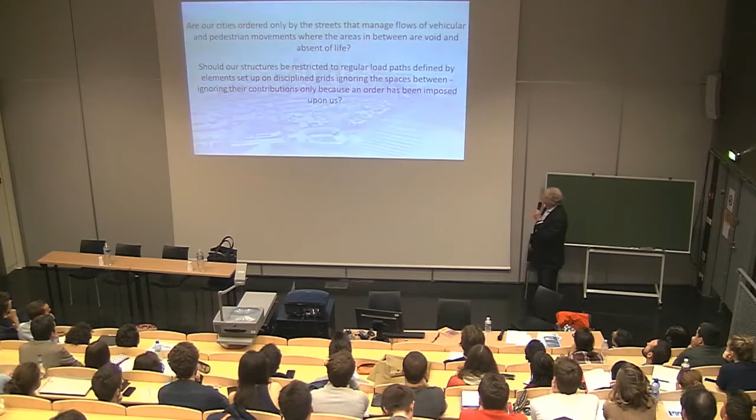So, a question. Are our cities ordered only by the streets that manage flows of vehicular and pedestrian movements, where the areas in between are void and absent of life? Should our structures be restricted to regular load paths, defined by elements set up on disciplined grids, ignoring the spaces between, ignoring their contributions only because an order has been imposed upon us? Should our structures be designed as static objects or as objects that are in continuous motion? Should we continue to think of our structures two-dimensionally instead of volumetrically?

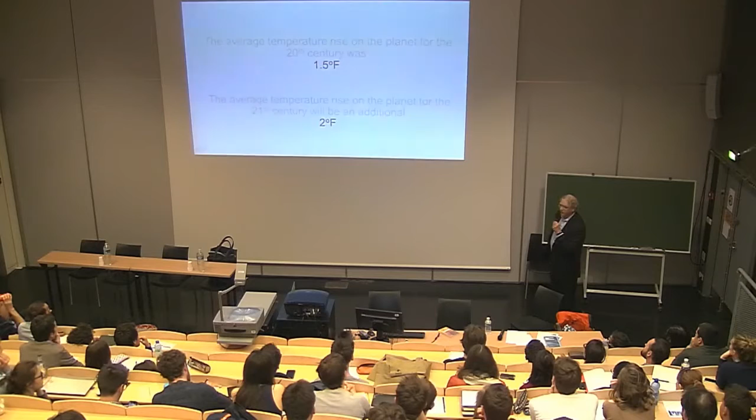Now, you can argue that this might be a natural occurrence, but I would argue that man has a lot to do with the change in temperature on the planet. Over the last century, it was about a degree and a half Fahrenheit change, and we expect that during the 21st century that change will be about 2 degrees. The impacts are clear. The impacts on the environment, the impacts on frozen land are all a result of this change.

So this change has brought on places like this. This is one of 2 places on the planet where every seed known to man is stored. And that's just in case. Just in case the change that happens puts us in a situation where we can't go back. So the question for us is, how do we have an impact on this potential change?

When we build buildings, most major buildings, it takes 20 years for the carbon associated with operations of buildings to equal the carbon that's emitted at the time that we build buildings. So if those buildings come out of service at any time along the way, we've put more carbon into our buildings the day we build them, and the operation becomes even more insignificant. So how can we think of ways of overcoming this change?

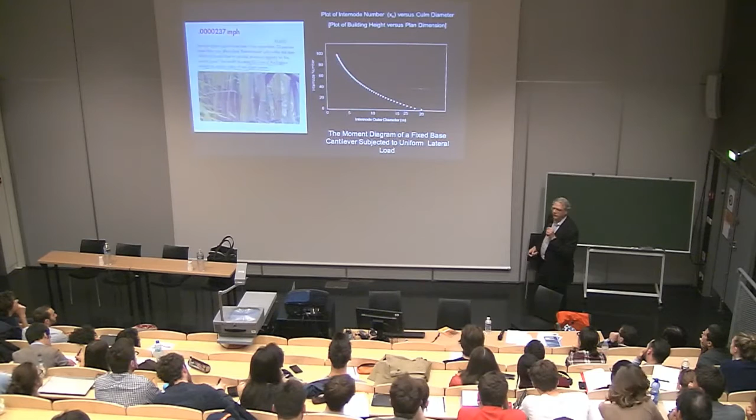And if you were to plot the relationship of the spacing, the diameter of the walls of the bamboo, or the thickness of the walls of the bamboo, you get an equation that looks like this. It's the bending moment diagram of a fixed base cantilever subjected to a constant horizontal load. It's the same principle. The spacing, the diameter, and the wall thickness are all related to the same mathematical principles as the fixed base cantilever.

So we looked at this idea, and we looked at applying this idea to a structure. And perhaps diaphragms are now outrigger trusses. They're connections between the core and the outside that aren't even. Perhaps they're closer at the bottom. They open as we get to the mid-height, and then they close again. We found that with this type of spacing to connect the inside and the outside, we could save about 20% of the material in the lateral system because that interconnection was so efficient.

The core varying in the form that you see here in the middle, the perimeter connected to that core to form an overall system that was combined with these heavy diaphragms. The spacing and behavior is in other places. It's in the tail of the dragonfly and other insects where, again, the section is hollow. The rings are there for a purpose, to keep the walls from buckling. And the rings or the diaphragms vary in spacing but are mathematically predictable.

It's been a few years now, and Mark mentioned this project. This is the Jinmao building in Shanghai. It's 420 meters tall. It uses concrete and steel and a combination of concrete and steel to form the structure. And the most important thing about this building is that it links the center to the outside through a series of outrigger trusses that happen only in 3 places along the height of the tower.

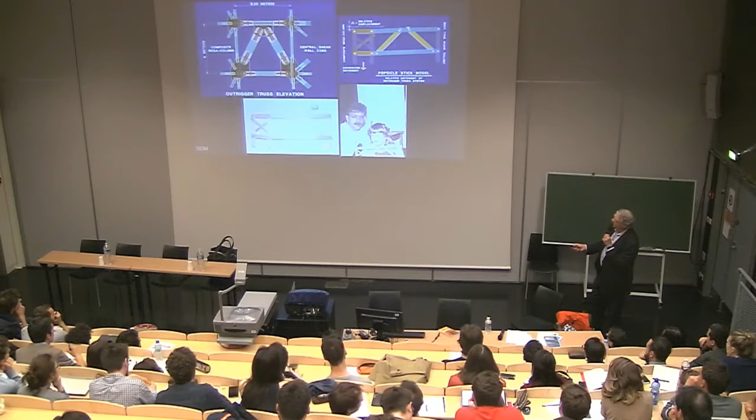So allowing the truss to move, and the most important part of it were the slots at the head of the diagonals. So it's been a couple of years, but this is what I did on Saturday nights. Okay, there's a beer bottle in the back. It's my daughter, who's now just finished graduate school. This is a popsicle stick model that we created with tongue depressors and wood dowels to create this and confirm that the relative movement worked, that the thing would slide.

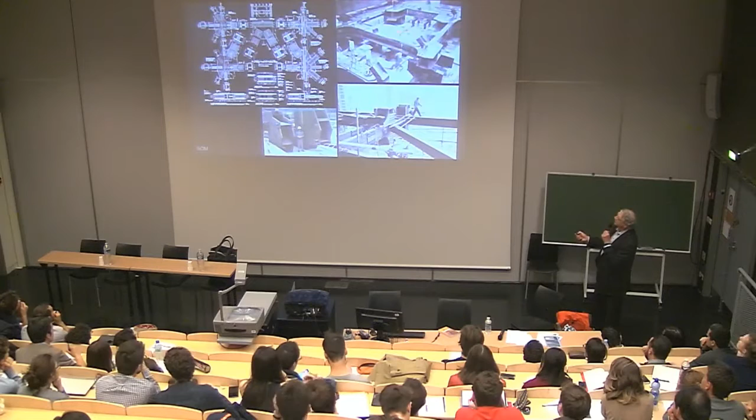So the working drawing, the structure, the truss at the plant, then in place, and to give you a sense of scale, that's one of the connections for one of the members in the truss. So it started with a problem where we needed to allow for relative movement. And it ended with this idea that perhaps structures should remain in motion, or we should think of structures in motion at times during their lives.

So there it is. It's finished. Now there are two others, one of which Mark talked about, which is on the left side of Jin Mao from this perspective, and on the other side is the Shanghai Tower, which is just finishing. And actually Jin Mao is the shortest of all three.

At about the same time, I went to this place, and this is called the Isle of Chiloé, and it's very, very far south. It's about an hour-and-a-half flight south of Santiago. And what I found there was indigenous architecture, a place where buildings were of low scale, but I also found that there were a number of Jesuit churches. And these Jesuit churches did very well during the 1960 earthquake. In fact, it was probably the largest earthquake ever recorded until recently. And I began to wonder, why did these churches work so well in the earthquake?

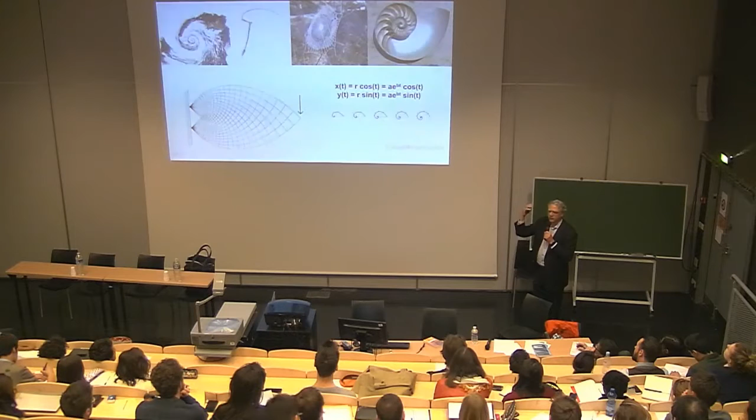So what if you took the hurricane and instead of thinking of it as an applied force, think of it as a resisting force, equal and opposite. Okay, imagine that. So imagine structure near the eye being strongest and least at the edges. And imagine standing the hurricane vertically or perhaps three-dimensionally. So you get a resisting system now that's thought of in a different plane.

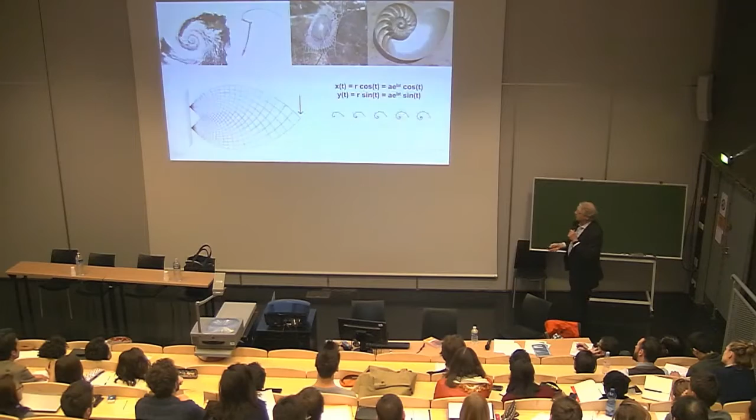And then combine the idea with something that has been around for a long time. And Michell came up with the idea mathematically describing the perfect cantilever with 2 points of support and a single point of force. This is the shape that the cantilever actually, its most efficient form would be. So what to do? This mathematical prediction.

At the same time, a friend of mine became very interested in the idea that we were developing for the tower, and this is an excerpt of what he said during an address to his incoming students for that year. He was the head of the San Francisco Theological Seminary, which was located in my hometown in San Anselmo, California. And he said at the time, what if we could develop strong, flexible, responsive, adapted, sustainable human beings based on the intrinsic architecture of the hurricane?

Buildings that exist in harmony with, instead of trying to resist and stand up against and conquer the powerful creative forces that might otherwise threaten and endanger us. So in other words, coexisting, right? So how can we come up with ideas that coexist with forces rather than just resist?

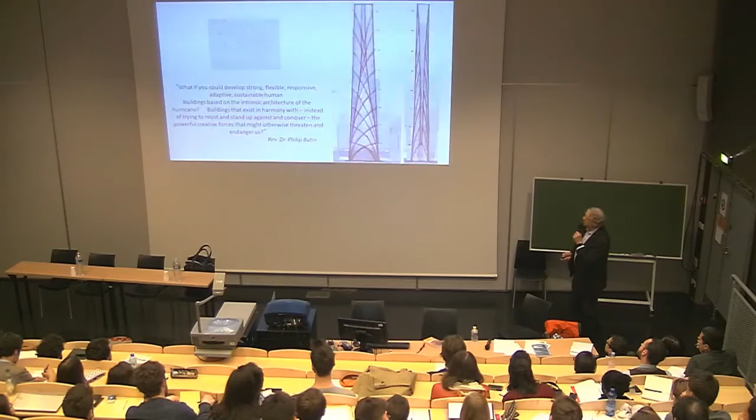So we took this idea, and the proposal that I had was a building that looked like this. Of course, it doesn't work. Our architects didn't. No. There's no way, right? Can you imagine that on the skyline of San Francisco?

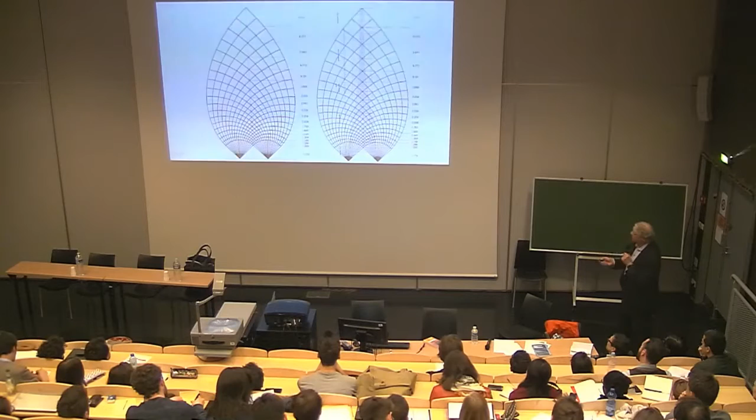Okay, so imperfection. The idea that this principle could be applied to something that had a varying form. So over the height of the building, we saw areas of highest demand at the base. We wanted to open the central axis to this train station beyond. And what you see is a beautiful resolution of structure that starts out highly concentrated and then opens as it gets towards the top. It's a proposal. As I mentioned, we lost the competition. But nonetheless, it's something that I think leads to other ideas.

There's a theory called emergence. Now, emergence isn't something that's absolutely new, but it perhaps sets forth a way of thinking that we might consider with our buildings. And emergence is the idea that the collective of common individual elements when working together are far more powerful than any individual element working on its own. All right? So there are examples of that.

Birds in flight, sand that's impacted by winds, termite mounds that are super cooled, honeycombs built by bees, and guess what? Cities, people, this room. This is an example of emergence. The idea that the collective, when sharing ideas and working together, are far more powerful than individuals on their own.

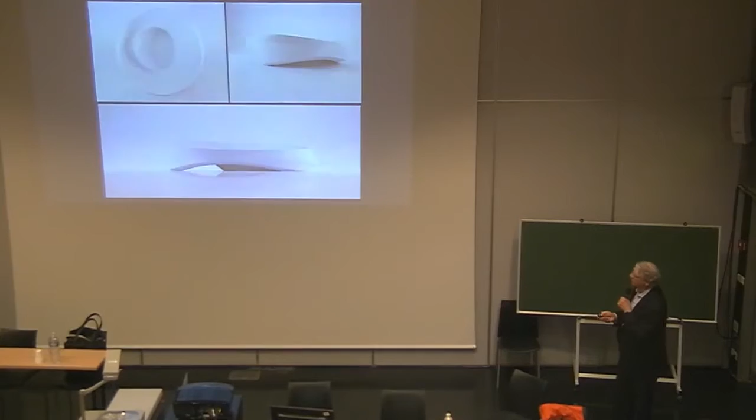And maybe we need to think about our structures more as surfaces or volumes rather than beams and columns to create something that perhaps is beautiful and perhaps something that leads to even future efficiencies. And you can use these optimization principles for forms that are not tall buildings, right? Buildings that have shapes that are less defined, perhaps. Points of support, in this case, an analysis that looks at gravity loads.

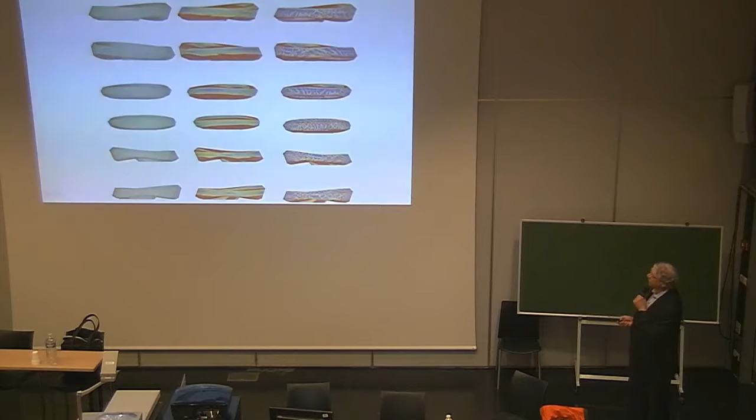And the diagram that you see on the far right is, again, areas of highest concentration of load, with the red and blue being least concentration. And you see these sort of organic trusses that start to form, providing the most efficient way for those forces to flow. And thinking about structure perhaps through spaces rather than just at the perimeter of spaces.

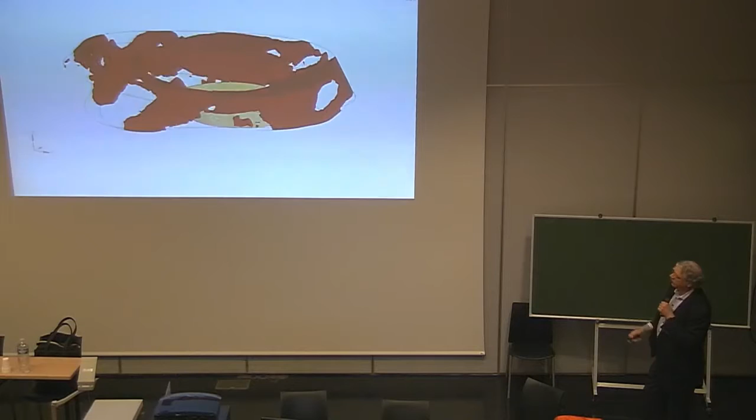How many of us think about this space that we're in and the three-dimensional volume of this space and perhaps structure that moves through this space in some way that we haven't thought of before? It's working toward the least amount of material for these points of support at the base, and you see the response of the positioning of material within the structure.

The strongest remains, right? It's the idea, in this case, winds against the Matterhorn. What's left over is perhaps what we should focus on in terms of our buildings. So buildings might look like this, where the structure erodes over its height. It's an apartment building in China that we've proposed.

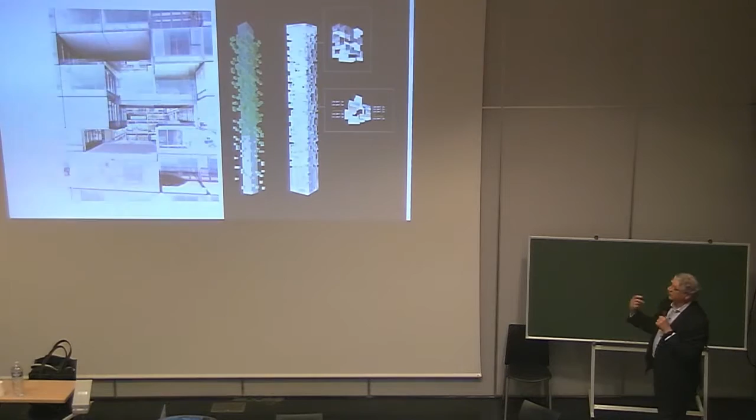It's not built yet. But what happens is it creates these very interesting spaces that are far above the ground, but perhaps the structure is eroded in a way, in this case maybe using concrete walls and so forth, over the height of the building that relates to architecture and creates something that might perhaps be unique.

Now you can take this kind of idea, those principles, and apply them to things that are pretty regular, right? This is a pretty regular looking office building in Salt Lake City. We've got a little problem. Cesar Pelli actually was involved with this project here. There's an air rights problem at the base of the building. So this is a performing arts center, and somehow the ownership rights are shared here, but no vertical structure can pass down through the volume of the performing arts.

Now, Salt Lake City is not a super urban, super dense place, right? So you wonder, how do we get ourselves into these sort of problems? Why would we have a performing arts center that spills over into the neighboring site? Anybody's guess, I don't know. It has to do, I'm sure, with the size of this particular site for the Performing Arts Center and the fact that the program exceeded really what they needed for the site.

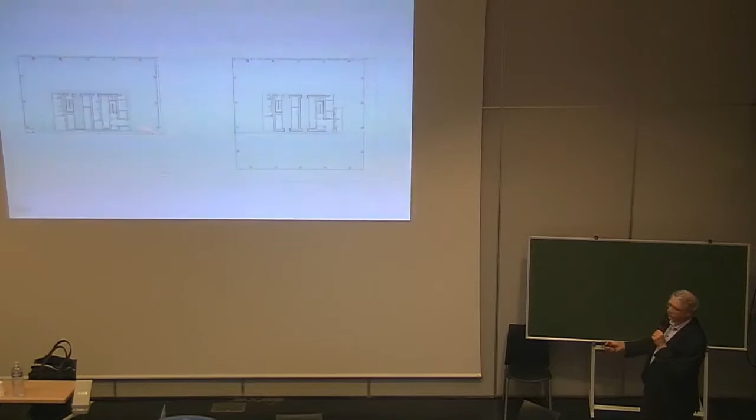So, here's our 25-story, very regular office building, not able to meet the ground on one side. And if you look at it in plan, it's pretty straightforward. This is a building that you might do anywhere in the world, where you have a center core, it's concrete, a steel frame at the perimeter. But guess what? You can't have anything here for the lower 5 stories of the building.

So what we did is we looked at this structure as if it was an optimized volume. And what you find is something really quite interesting and beautiful, where the areas where we have to take away structure, you find that the points of support, there's a concentration of load. And again, the areas in blue are not high demand. The red is the highest demand.

But this is a pretty wide building, right? So you'd have to step these tree-type shapes across the width of the building. And the tree shapes don't work so well with office use, right? So what to do? We've got this nice study. But we found also when we looked at this study that the building tends to turn over, right? It makes sense because it's highly eccentric and it's actually leaning under its own weight.

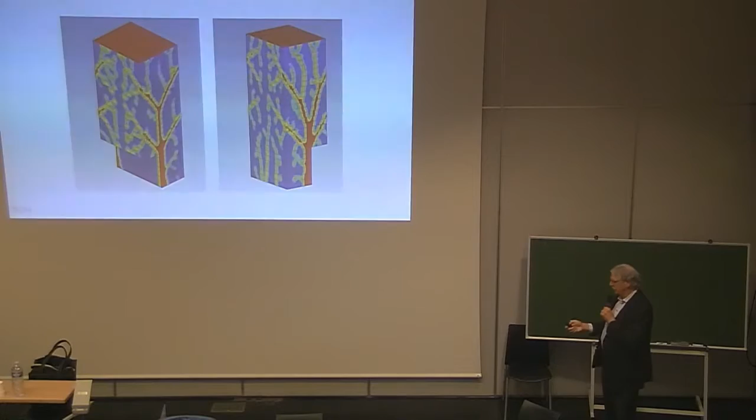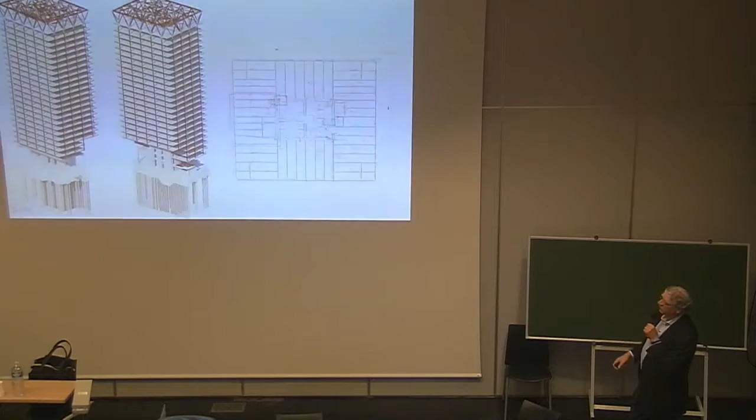So instead, we took away all the columns at the bottom, all of them. And we sent the core up for 25 stories, and we suspended the entire perimeter of the building with a truss system at the top. And these are all columns in tension. We built it from the bottom up. We had a special system to do that. And then once we reached the top, we placed the truss, we pulled the temporary shores away, and this entire building is supported by the central core.

The bearings come back. The pins and the bearings are repeating themselves. Now, this isn't a base isolation where you put bearings on the bottom, you put them on the top. And you might ask, well, why did you put them on the top? We put them on the top because we were trying to take load from those big trusses and send it vertically through the core. We didn't want those trusses to bend the top of the core.

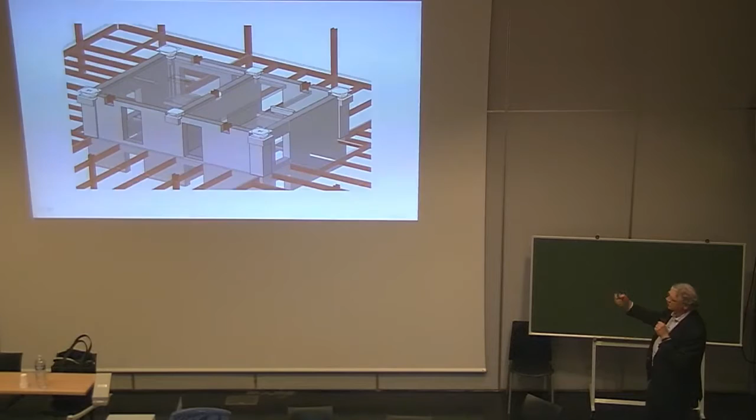So using these bearings, we actually forced most of the reaction to go straight down into the core and pre-compress the core, you might think of. So we do have large earthquakes, so we have overturning, but all of this weight being on the core actually helps us for overturning during the seismic event. And then we have things like these shear keys that keep the truss in place so it doesn't just freely move at the top of the building.

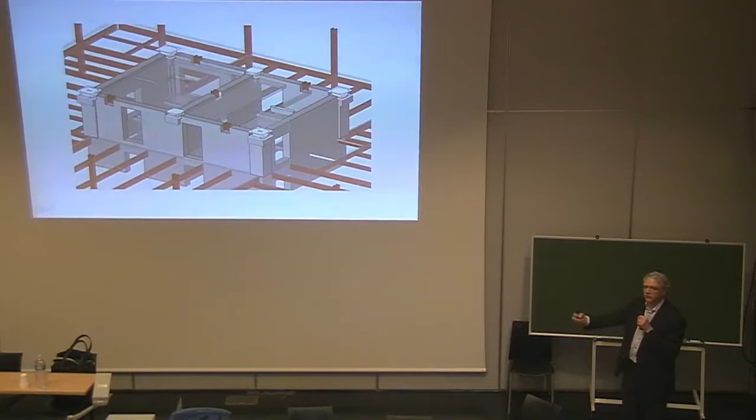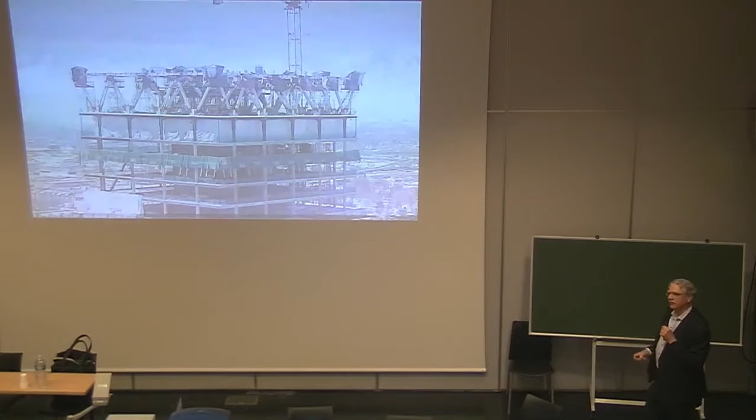So this has really happened, and we actually created a saddle system on one face of the building to temporarily support it. We used the core like a very large mast during construction to do that. And this is just a few weeks ago. This is a beautiful place, mountains beyond, this truss system being placed at the top. But the idea came from that optimized system where we were looking at that central core and also the way those loads would flow.

So this was the night before we actually released the temporary system at the base of the building. And one thing to note that because of the construction sequence, we actually had the exterior wall being placed on this building before we released the jacks and having the building come down, which is a very difficult thing to do in terms of controlling movements and so forth.

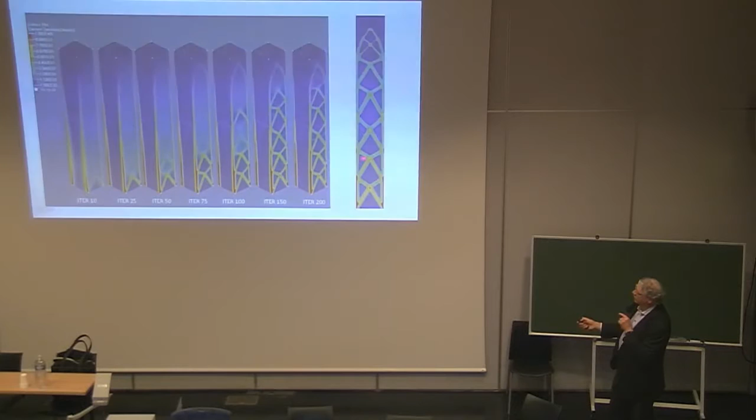Okay, so back to nature. You know, we've looked at these sort of optimization studies for tall buildings, and in these studies you find that the bracing systems for our tall buildings, in fact, are more efficient if the bracing's not concentric. Okay, so you think about the John Hancock building in Chicago or other buildings here in Europe using concentric braced systems, right? Well, you find that if the bracing system, in fact, was a geometry where it's approximately 3/4 to 1/4 in height, the system is much more efficient in terms of resisting lateral loads.

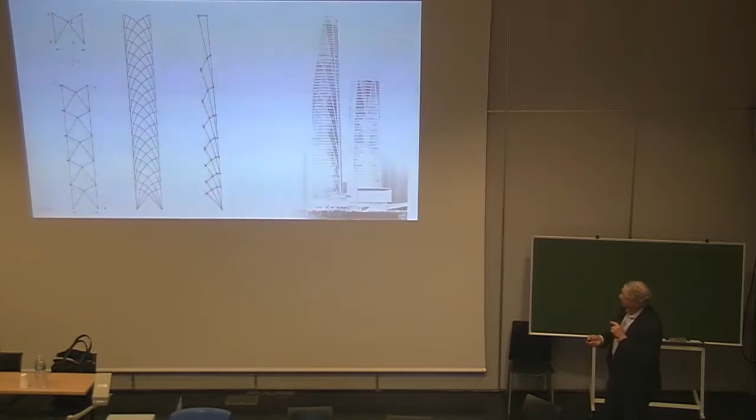And there's an interpretation, okay? So architecture can be pretty static. If we were to design that building the way I showed you before, it's a pretty sterile, pretty static kind of idea. But what we did on this project in Shenzhen, and it's a building that's under construction, is that we took the original concept and we interpreted it. First with a regular spacing over the height, and then next varying the spacing over the height. So the density at the bottom is sort of like Transbay, the one I showed you from San Francisco. But what it does is it allows for greater open space, column-free space at the top of the building, and a response that I think is far, far better than it would be with the sort of theoretical solution.

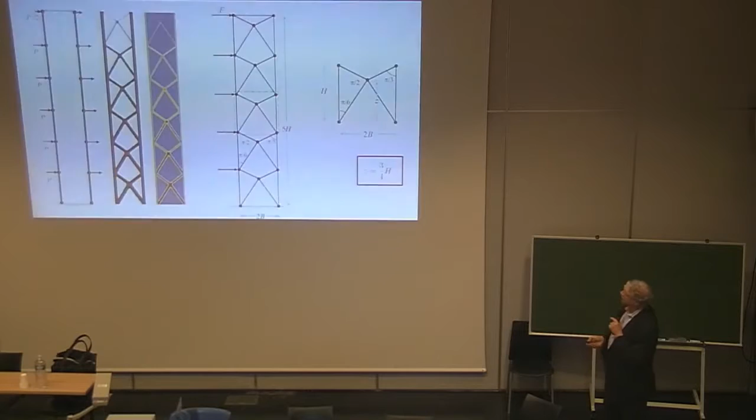So here are the principles, and it's based on virtual work. It's based on the application of lateral load and the placing of these bracing members that give us this very efficient response.

Now, for tall buildings, and we had a small earthquake here just a week or so ago, but for tall buildings, the greatest dilemma has been that for a tall structure, the best solution is to create members that are in tension or compression. Okay, bending is very bad in tall buildings, right? So moment frames in a tall building, bad. Not that it doesn't work, it's just that it's very inefficient, right? But if you could create structures that had diagonal members, that's good, tension and compression. But the problem is when the earthquake comes, tension and compression could become very brittle, right?

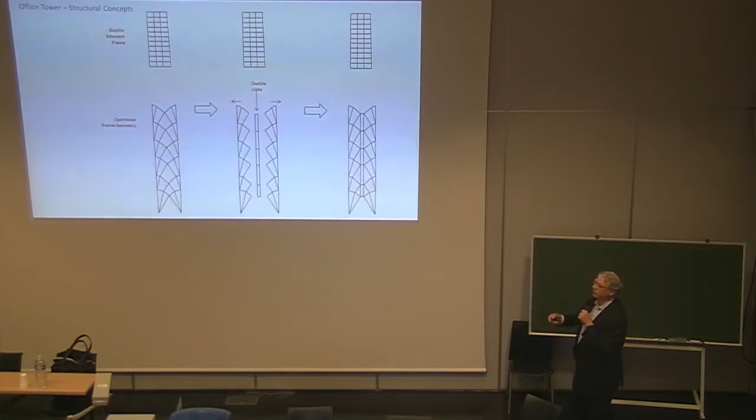So what we've done is we've created these links or these fuses that allow the building to fuse and dissipate energy during the big earthquake. So it's very stiff, I'll say, for typical wind conditions and moderate earthquakes, but when the big earthquake comes, these links will fuse and dissipate energy, sort of like that pin joint that I showed you earlier. So we think this is a breakthrough in terms of how we combine systems in very tall buildings and how we're able to get efficient structures and deal with the earthquake at the same time.

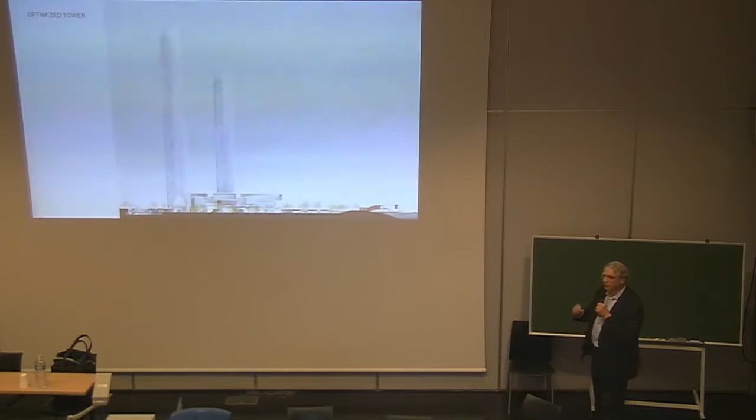So this building has that. There's a fused system up the height of the building. It happens on both towers. It's on the sides of this one. You can't see it. But combining and thinking of both loading cases, primary loading cases in design. Really large open spaces at the bottom, no columns, just structure at the corner. Again, reflecting on Trans Bay, which was probably 10 or so years before.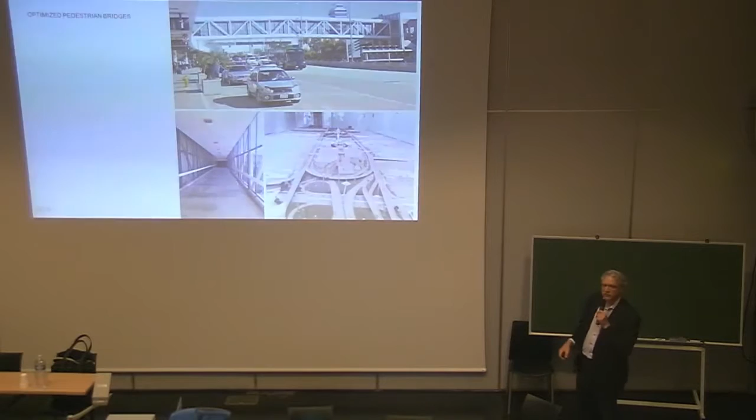Now you can take this and you could think of it on the horizontal too, okay? So these aren't just principles for tall buildings. These are principles that you can use in bridges. Now, forever and ever, we've got bridges, Warren trusses and Pratt trusses, and trusses that are very efficient, that we just think are good enough. We just keep using them, right? I mean, you see them everywhere. Now, there's some creative engineers. We've got a couple of creative engineers here in the room that rethink this and do really beautiful responses that are not so conventional.

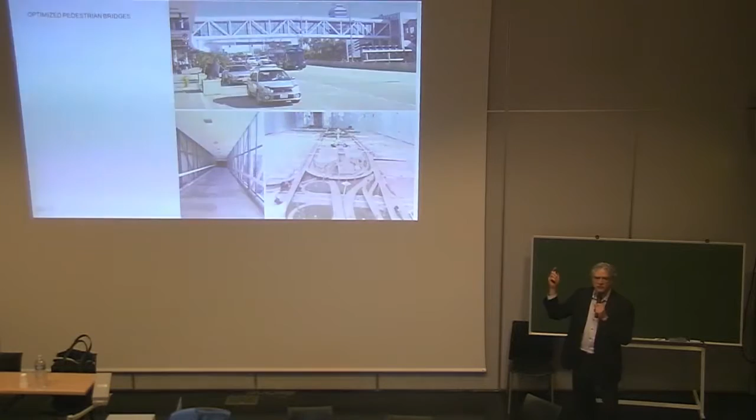But if you take this, and this is Los Angeles, this is at the airport, pedestrian bridges that are up to about 160 feet long. And you take the principle of the tall building and you turn it on its side, where you have the fixed base of the tower now in the middle, okay, and you mirror it. And you look at the bracing, the diagonalization, not as a conventional Warren truss or Pratt truss, but as something that looks more at this 3/4, 1/4 principle, and you find that you can save 20% or so of the material by doing this.

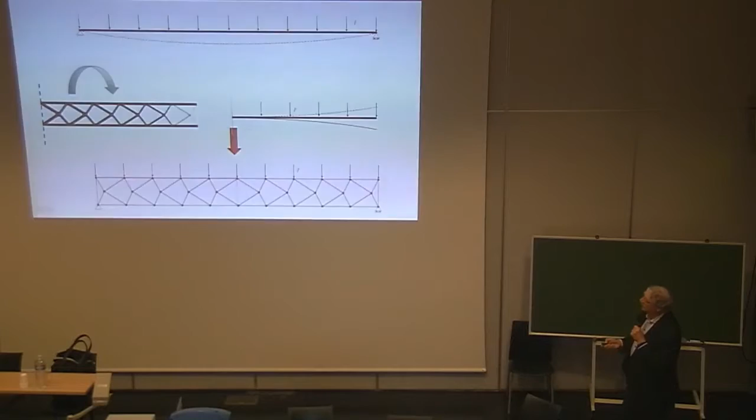Now you could argue, oh, this is harder to build, right? This is not what people normally do. All right, that's the first thing you're going to hear. But the point is that these opportunities are there, and I think we're getting better and better about the communication of our design drawings to construction. So these things are going to become, I think, less expensive to build, and in the end are the right things to do. Savings of material, perhaps prefabrication, these are all part of the idea.

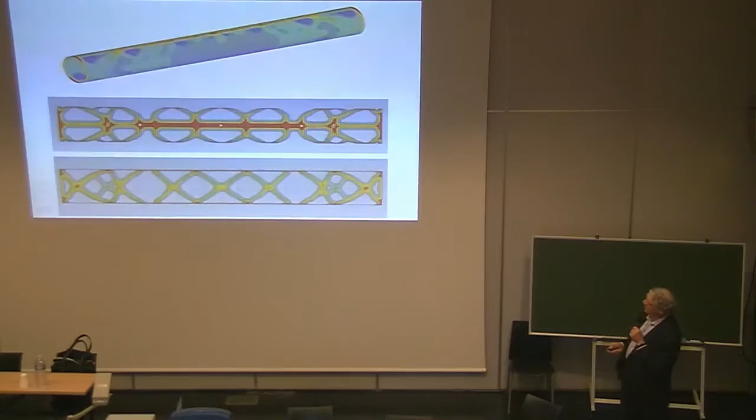And you can use these optimization principles along the length. In this case, it's a cylindrical section that shows the placement of these trusses and then the interpretation of these trusses when we look at it three-dimensionally, right? So it's not something that necessarily has to be in a plane. It can be around the shape.

Now take this idea and put it in plan. And Mark Hymans is here. Mark worked in our studio in San Francisco. And he's very interested in post-tension systems for buildings, right? And we were building this building, which is an office building in San Francisco. I'll call it a core-only building. So it's all concrete. And here it is. Here's the core. And it's got a series of columns around the perimeter. That's it. So this is something we build over and over again.

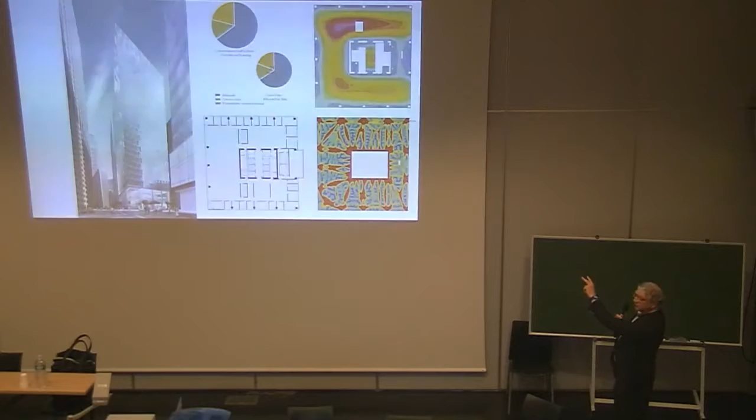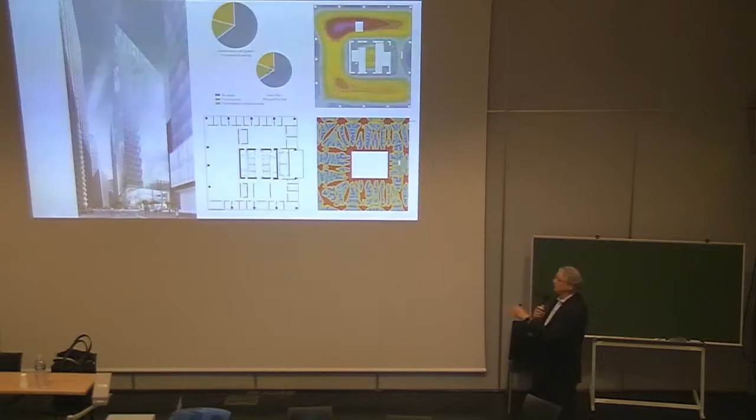But what if we took these same principles and looked at it in plan, mapping the stresses in plan and mapping the placement of post-tensioning and materials, and also creating flat plates where you look at things like deflection, long-term creep and shrinkage, so that you can camber in advance and look at it carefully. So the spans here are about 14 meters from the core to the outside. They're pretty far, and normally we would use what? Beams, maybe steel, but in this case, the idea was to use a pure flat plate. Now, when you think about the environment, you think about these kinds of things too, not just a flat plate, but maybe putting things in the slab, right?

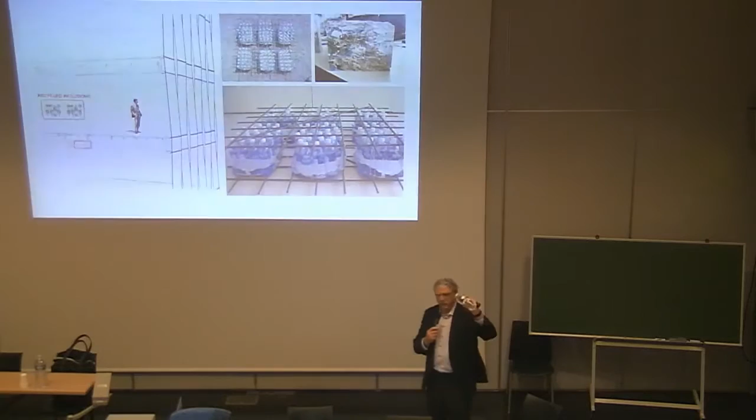So, okay, these guys, well, a lot of people have these. When we drink water from these water bottles, we usually put the caps on them, right? We usually take them and put the caps on, and then we say, we'll put them in the recycling bin. Okay, probably 80% of these things can't be recycled. They just go into the landfill. We started thinking, you know, what about this landfill that we've got, and what happens inside of this container when you put the cap back on it? It traps the air, right?

Most of our slabs in our buildings, for instance, if you had a two-way slab where you had 4 columns, most of the concrete in the middle you don't need. And the only reason why we put the concrete there is because it's easy, right? We just pour the floor, we put the concrete in. In fact, the concrete in the middle is actually adding mass, and it's using raw material.

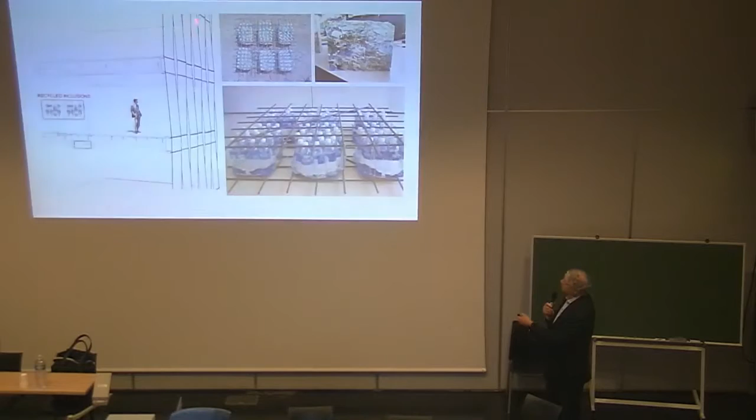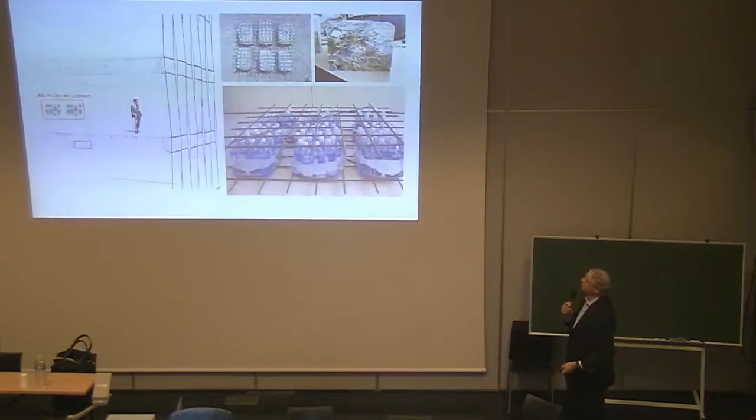It's creating carbon. But if we put these water bottles into the slab, now I'm not saying just throw the water bottles in, okay? You gotta place them in an engineered way. You gotta get concrete in between them, and you've got to place them so you have concrete on the top and on the bottom. But it's a volume that you can take away material and use this stuff that's going to end up in the landfill anyway, right?

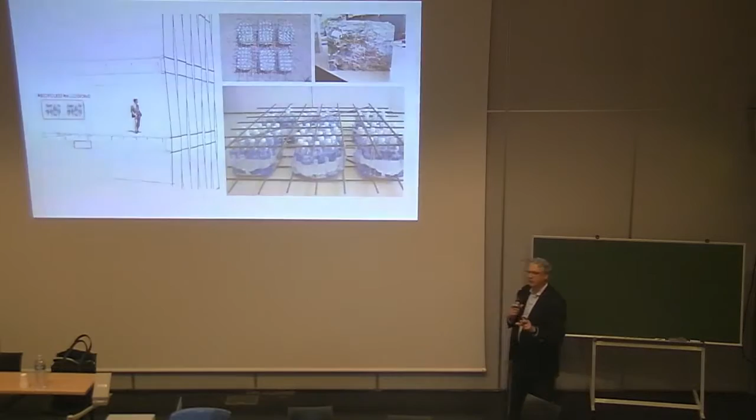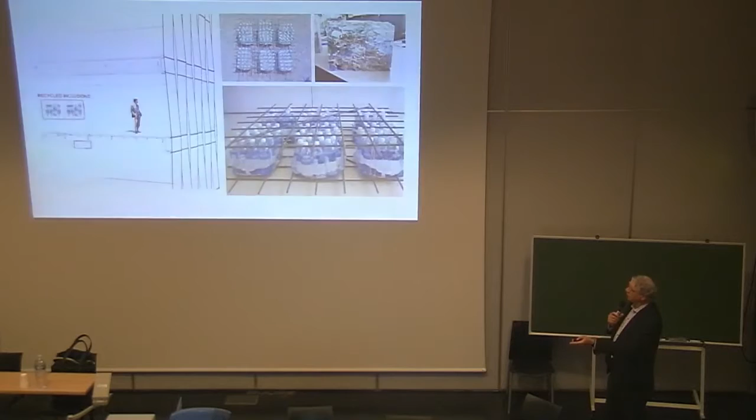So think about these things when we talk about the environment, and it doesn't have to be water bottles. It can be compressed plastic, right? There are other ideas out there. There are spherical balls people have put in, and all that stuff works. But the point is, can we use material that's going to be in the landfill anyway in our structures and lighten the mass? In our case in San Francisco, because we have high seismicity, it gets into our lateral systems and everything, so if we can lighten the mass and build a lot of concrete buildings, it's a good thing, right?

Okay. Save material. For this building, we could save 20 miles of concrete sidewalks, or maybe the steel for 1,000 cars. A big deal. It's worth thinking about. The client for this project was really excited about this. In fact, he said, okay, we should get people to get water bottles from San Francisco, we'll assemble it, it'll be a community effort, we'll bring the water bottles to site. So whoa, wait, it's a little bit more complicated than that.

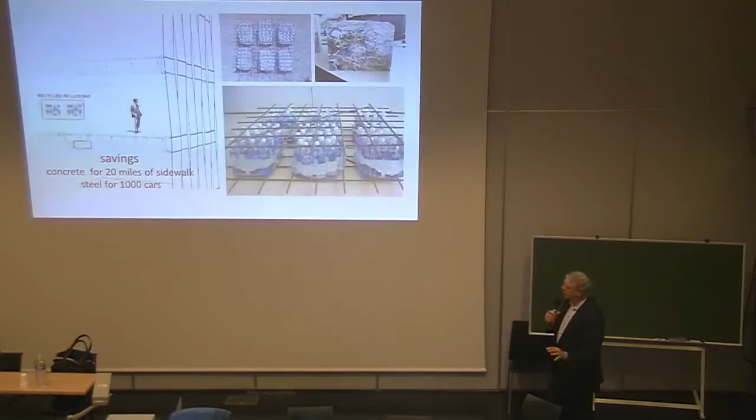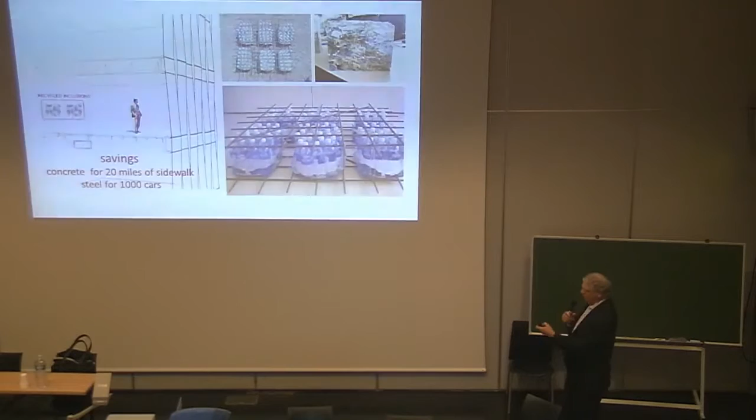In the end, he sold the building and the site, and the client that bought it, get this one, even with this plastic, they said, look, the supply is not fast enough. We can't get the supply to the site fast enough to build this building. And it's true, because we're stuck on this idea that we have all this material, but getting it to the site in a way that's controlled takes a process. It takes a will, right? And he just felt that there wasn't enough time for this to happen. So I don't know, we'll see.

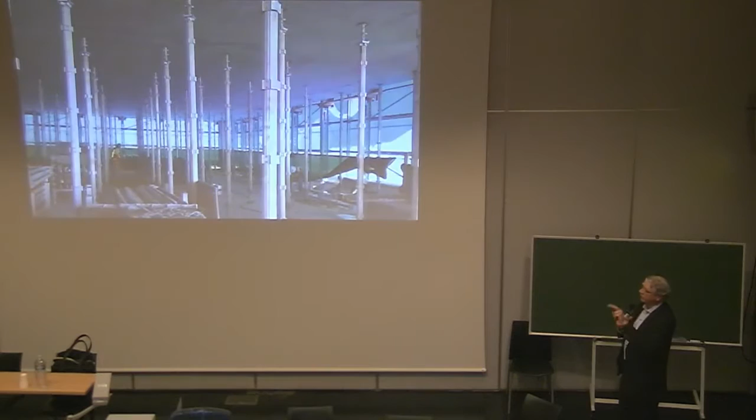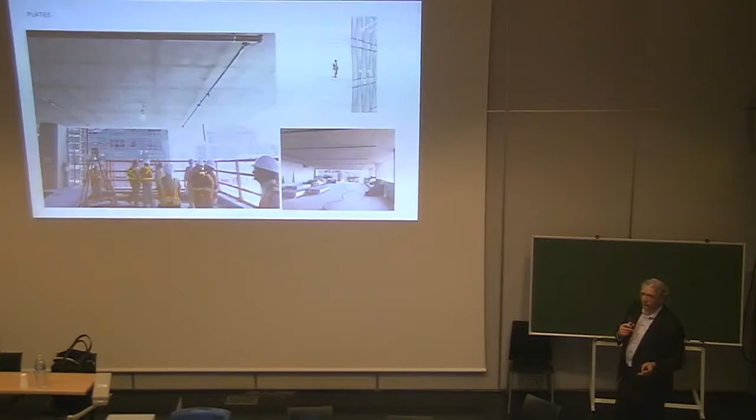But what did happen is that we digitally mapped these long span slabs. We placed a camber in the system. We used post-tensioning to create these wonderful open spaces, free of beams, with a lot of light, and tight floor-to-floor heights, okay? So long span concrete flat plates are something worth thinking about in our buildings, especially if you have multi-story buildings. And it's all about carbon, right?

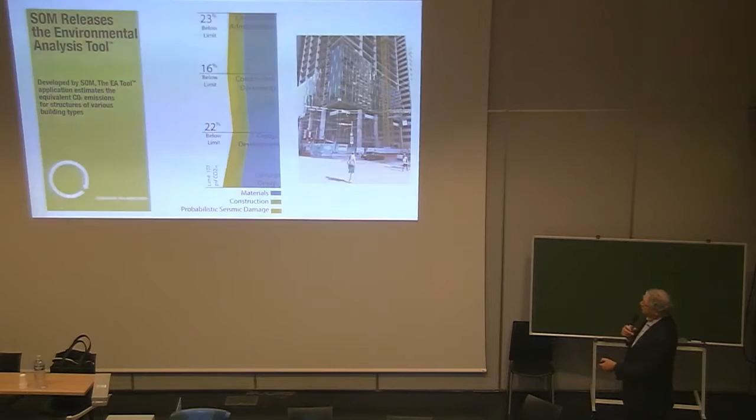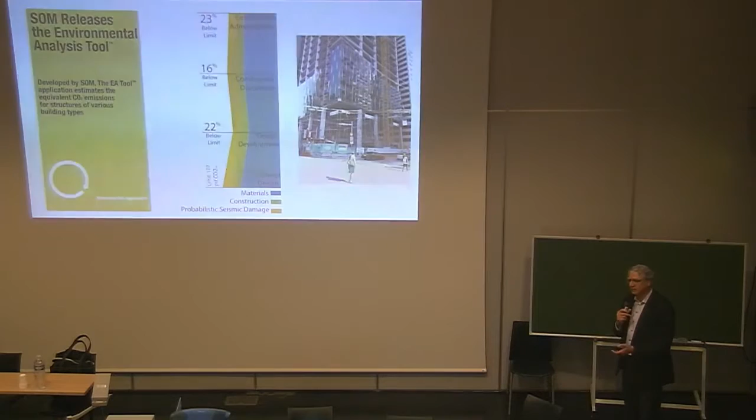It's about reducing carbon. If you go to our website, there's actually a program; if you have a Mac, unfortunately you can't run it, I have a Mac and I can't run this program, but if you have a PC-based laptop or desktop, you can run this. It's free. This calculates the amount of carbon in the materials that you use for your building, in the construction, and also what we call probabilistic seismic damage. So if you have a higher performing system like seismic isolation, the impact of carbon is going to be less over time when we look at a building over its life, right? Anyway, check it out.

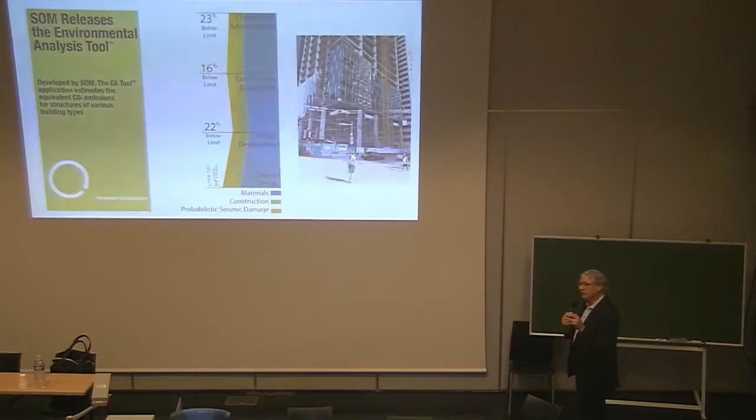It's available, and it's something that, when we design, we can do better at. For instance, as our design gets refined from concept all the way through construction administration, you can look at reducing carbon and then actually measuring carbon, measuring the amount of materials and the time it takes to build your building, right? So it all adds into that carbon calculation. And this program will do it for you.

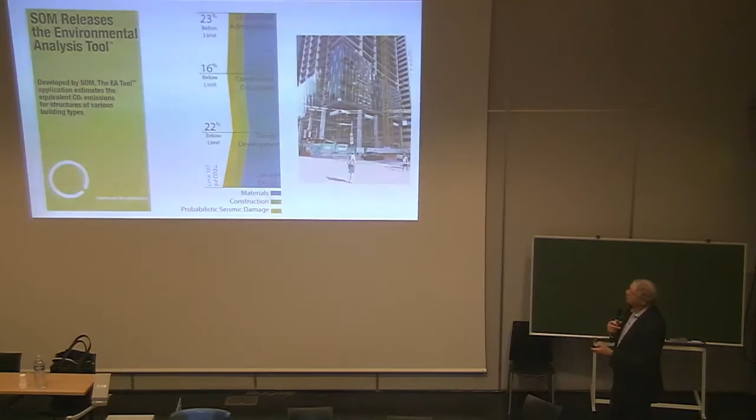That's it. Everything works within it. Columns are carefully placed between the partition walls. You get these great column-free edges, and we have a flat plate, just like 350 Mission, the one that I showed you before. But now we're thinking, well, how do we do a better job of the post-tension system? How can we optimize, use those same principles on the horizontal plate that we did for the vertical building?

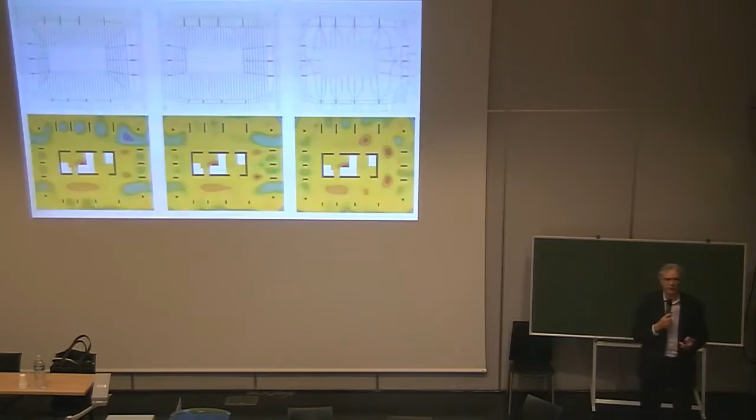Now look at what happens. It looks much more like an organic form or a flower, and guess what? It maps the actual force flow in the slab. So it places the cables exactly where we need them. So what we've been doing for all these years is okay, but maybe not the best way.

And we know that when we use post-tension cables, we can move them in plan and in elevation, right? They're flexible, whether they're bonded or unbonded. Typically in the United States, we use unbonded tendons. And you can create these floor systems, and you still have to coordinate with mechanical and that sort of stuff. And you can find that you might reduce the amount of post-tensioning tendons in the slab systems by 25%.

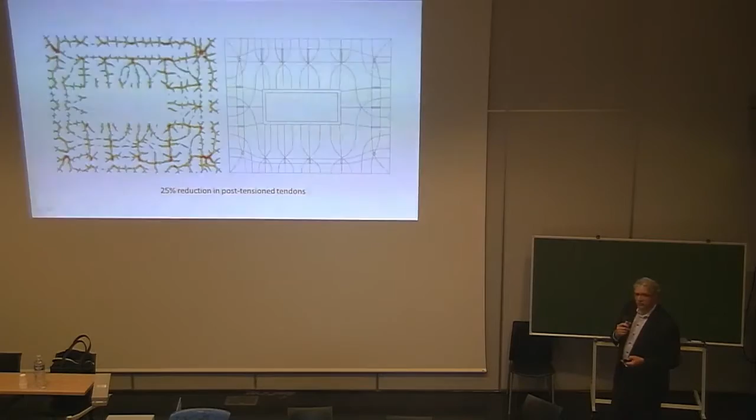It's a big deal. Post-tensioning is expensive, and we do a lot of these types of buildings. So these are kind of incremental changes that we hope will find their way into the main construction marketplace based on these principles. Okay, so I'm going to just say a few more things.

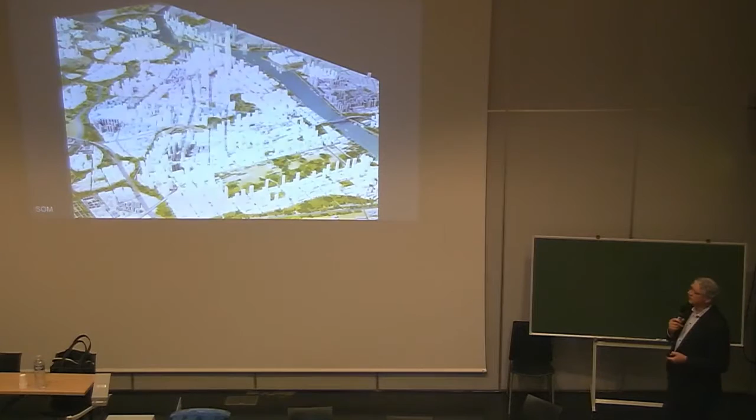Back to the city. Everything that you see in white is planned. This is in Guangzhou, China. So the plans are not insignificant, right? So you wonder whether or not we can have a great impact on cities. When we design cities, we think about materials, we think about transportation. And cities are loaded with data, right? The technology today with cell phones and other things, it goes without saying, data is everywhere. The question is, what do we do with data?

So what if we thought of our cities like fields? I call it sensory fields. Fields that have data that we can use for our buildings, perhaps. Ground motions, like when the earthquake's coming. It happens pretty quickly, but in advance of that earthquake hitting our site, we know the speed that it's moving, the direction that it's moving in, and the amount of force that's coming. And perhaps our buildings could be tied to that knowledge. Wind is the same way. So how do we take the field and connect it to our buildings?

Well, we do a lot of work with analysis. We know a lot about our buildings. We analyze them to death. We look at every single load case. We look at every direction. But what if we knew the direction and magnitude? And maybe our structure can respond only to that direction and magnitude. And maybe those analysis models are now tied into the actual live data that might come to that building during an event. And maybe we can do things like this, where we could elevate buildings, decouple buildings temporarily.

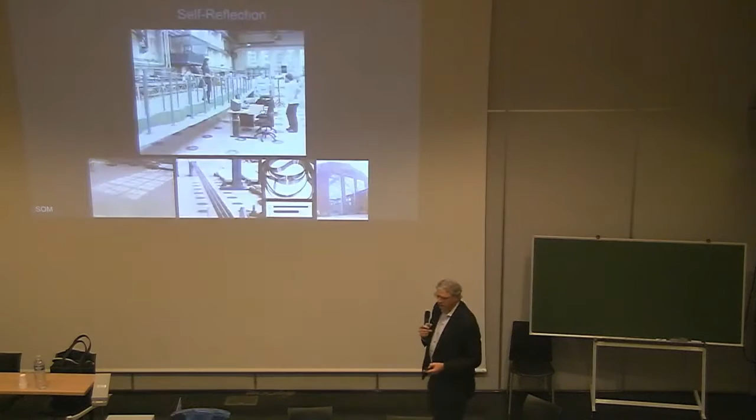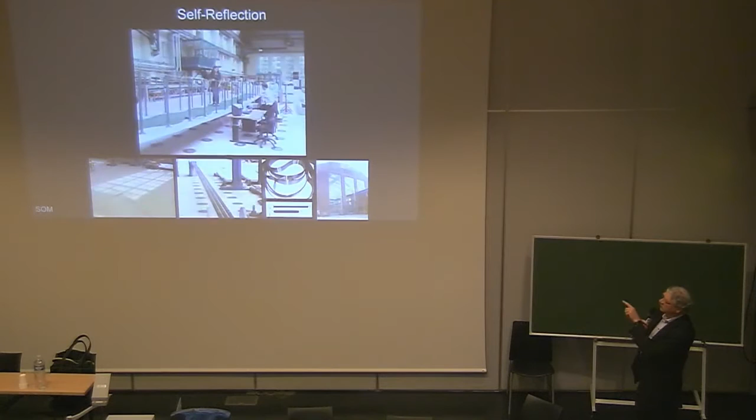There's another idea. This one may not work either. I don't know. Let's see. Okay, it does work. I call it self-reflection. This is the same daughter from the Eiffel Tower. It's the same trip. We're in Berlin now. This is a carbon fiber ribbon bridge. It's a pedestrian bridge.

And all the graduate student did was introduce air into the handrails, and it changed the characteristics of the bridge itself. So you wonder if we can actually control the movement of bridges, the movement of buildings in a temporary case where we call it a self-reflection. So we get movement that's starting, and then we have a reaction where we introduce something like air, or maybe some liquids into this building.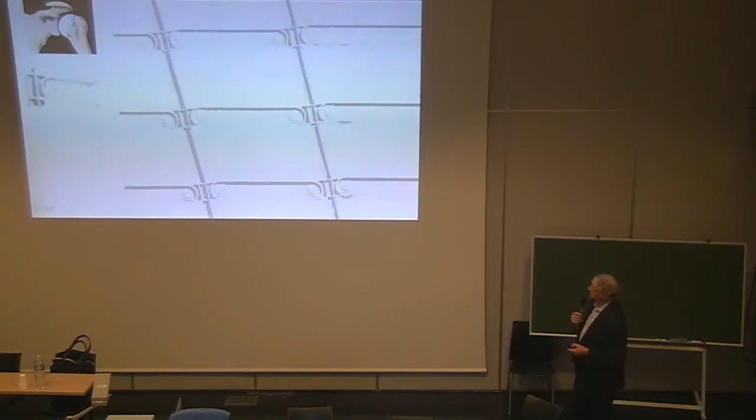And the point here is that now materials that were very high strength and very, very minimal could perhaps be used in our buildings and our bridges if we use this type of idea. Okay. So self-reflection, joints that perhaps would rotate where others wouldn't. Maybe there's a way to control the friction in these joints so that some joints have a higher coefficient of friction than others. Maybe there's an idea that we take our buildings and we think about them as rheological systems. Systems where fluid is part of the idea.

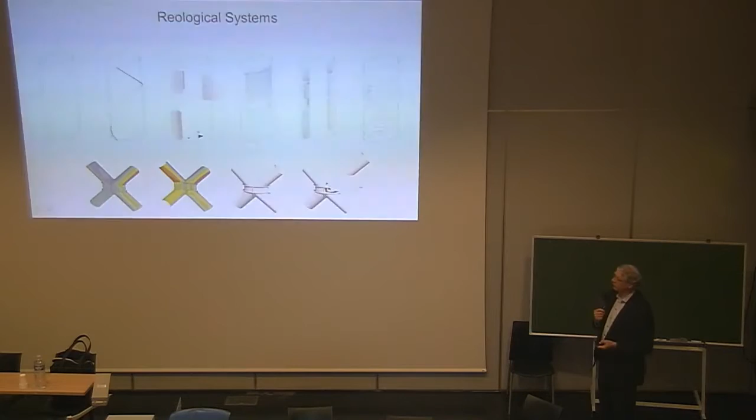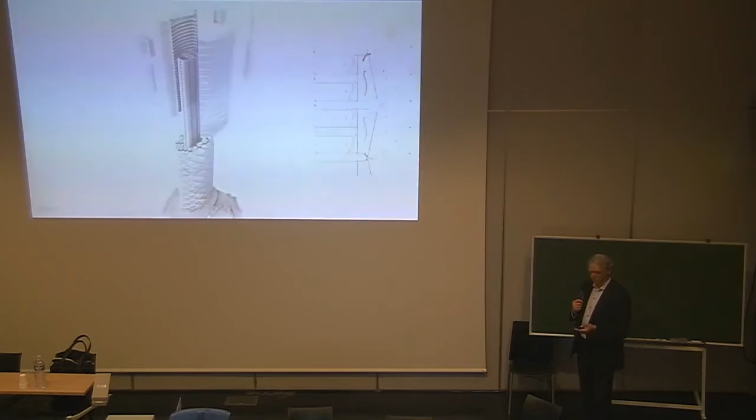So in its basic sense, we build buildings that have structures that perhaps are made of steel, that have hollow sections. Today, what do we do? We fill them with concrete. So we make them stiffer by filling them with concrete. Years ago, we used to do things like fill them with water. But the idea might be that instead of just double wall systems like the one that's shown here, maybe the structure has multiple purposes. It resists load, but maybe it resists load in a very efficient way, and maybe these are conduits for other things, maybe liquids, maybe materials that change phase, right?

So there's an external energy that's applied, and it takes a building that's otherwise very static, perhaps, into something that introduces a phase change. So the simplest sense might be a liquid to a solid, right? So if you understood where the demand was the highest, maybe you take the very minimal structure and you change the characteristics within, and maybe you change it so that they're stiffer when needed, right? So liquid to a solid, temporarily. I don't know. It's a way to take the absolute minimal structure and perhaps change its characteristics over its life when it's needed.

Planning of cities. You know, I think there's much more to this, and there's much more to offer from the engineering side than has been thought of in the past. What you see in the blue in this diagram on the right are areas where you've gone below a target efficiency for use of your floor. So you know how we set a certain net area for use, right? If we drop below that target net area, let's say it's 80% for a building. We want 80% of the area to be usable. In this case, for those buildings in the areas in blue, we're under 80%.

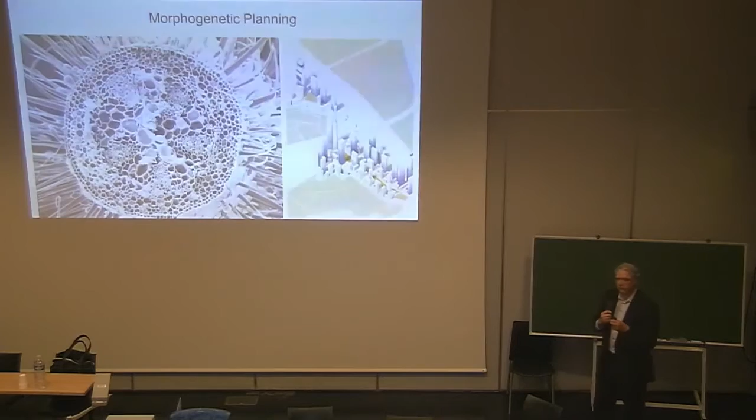And why? Why are we under 80%? Maybe the structure's too big. Maybe we're using concrete. We should have used steel, right? So the structure's taking up space. Maybe the elevatoring is such that it's taking up too much space. You have too many elevators, right? But a lot of it's based on material and geometry. So you wonder, when you plan cities, shouldn't we be thinking about this? We shouldn't be just thinking about sun and shadow and transportation. We should be thinking about geometry, placement of buildings on sites, materials, efficiency. Efficiency is probably the most important thing to our client, because that's what makes money, right?

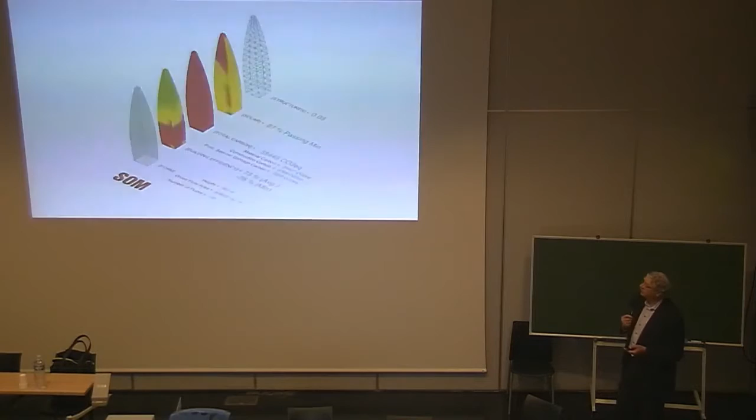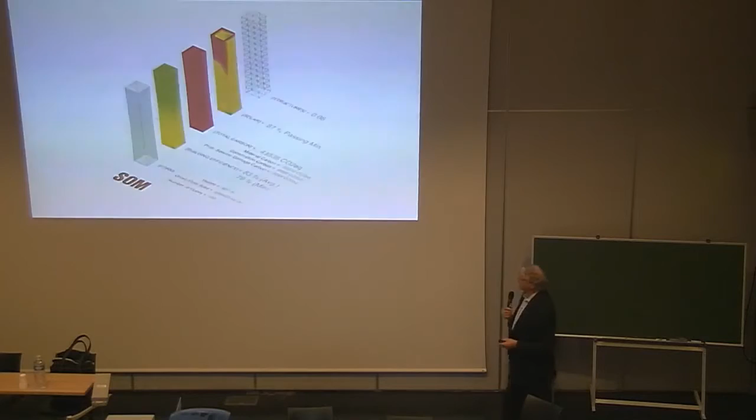Usable space. So we've been developing these ideas that parametrically model cities interactively. So looking at form, building efficiency, carbon, solar, and structure, and maybe there are others, all at the same time. And you can weight these things. So you could say, well, my building efficiency is most important, so I'm going to strive toward the highest efficiency. Or the form of my building is the most important, and I'll put less weight on the other things. But this is a way to take planning perhaps to the next level in terms of how we think about our cities.

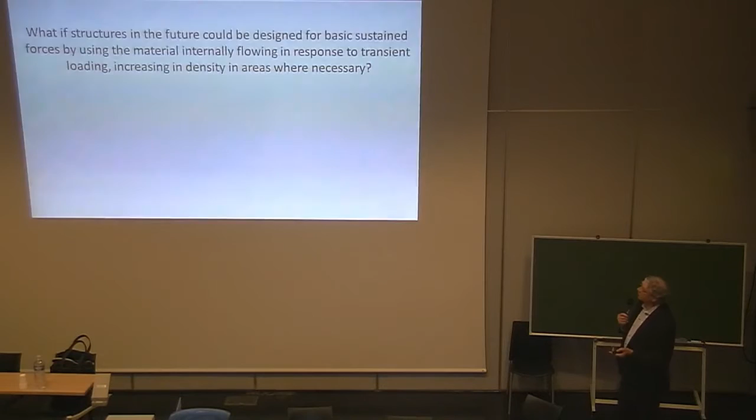So it's a progression, right? It's this path that great architects have set forth for us, and I think when we think about these ideas in the future, what if structures in the future could be designed for the basic sustained forces by using the material internally flowing in response to a transient loading, increasing in density in areas where necessary. What if the behavior was three-dimensional, considering the volume of the structure rather than just at its perimeter? And what if the behavior emerged from a central controlling force of a collective intelligence? Maybe structures would look different, right? It's another step of evolution of what these ideas might be.

Okay, so there's a book.

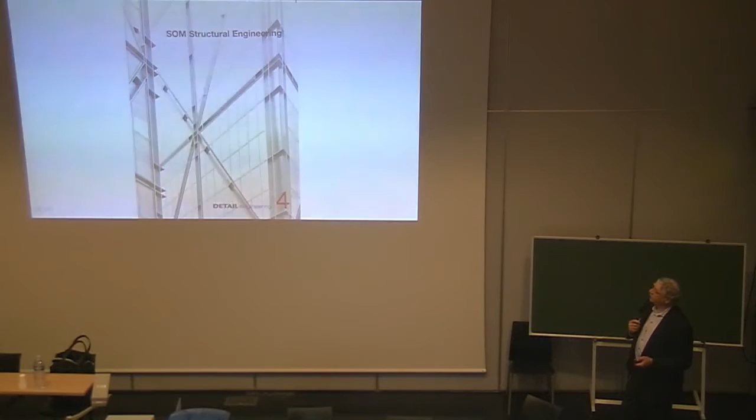So back to the ground. You know, there are things that we do that work. They work. And in China, there's going to be a tall building. In fact, there is a tall building now sitting on this site. These are the caissons that are being hand dug, and they telescope down about 30 meters. They're hand dug by a team, and typically it's a brother and sister, or a man and wife, a couple of brothers.

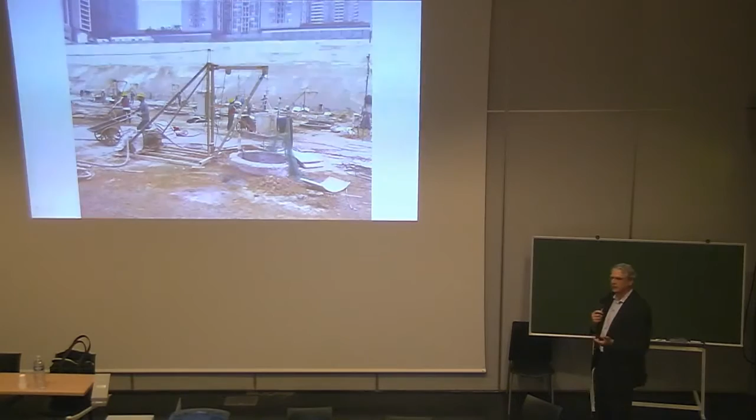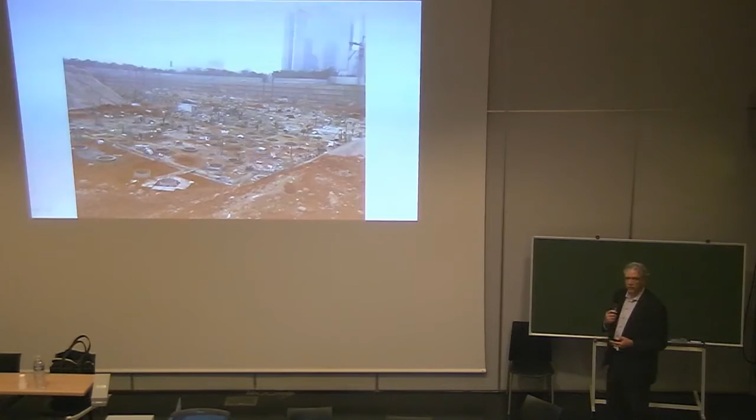The most important job is actually not digging the hole. It's the person at the top that makes sure that nothing's going to come down and hit the person inside the hole, and in some cases, getting air down inside the hole. So this idea of this collective, right? But it doesn't have to be so scientific always. And we need to think about what it means when we design our buildings and how these principles that are new work with principles that are very old, that work and make things safe.

And think about how things grow and how that might impact our ideas about design. And this very fluid way of freehand thinking about structures and form and what these simple sketches might lead to, right, in terms of design. And it could be one of the solutions. It doesn't have to be them all, right? And so these fluid forms set yet the next step in the way we think of design. There are other ideas that could happen.

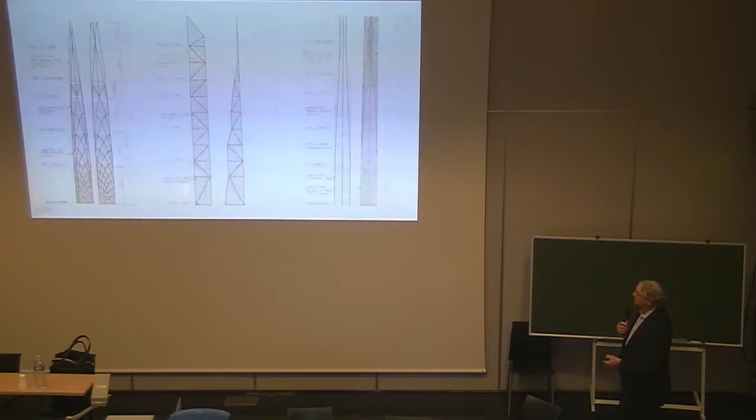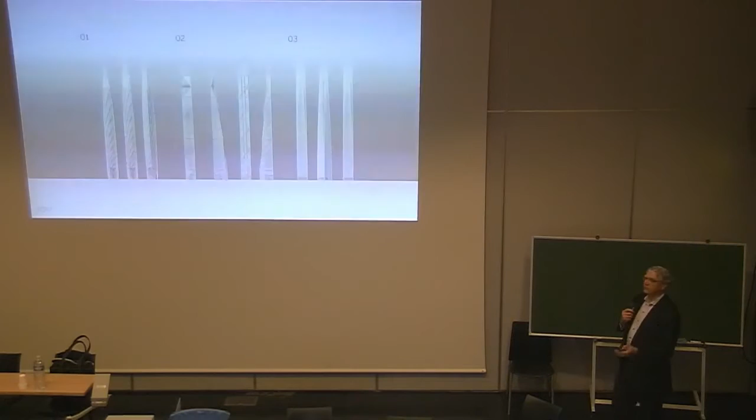This is for a 600-meter tall building in Bangkok that's under concept design right now. And you take them and refine them into something that hopefully will be beautiful and define architecture in a new way. So it's a work in progress. It's something that we think is really important, and I think we've got a great responsibility to do this. And I think these things create something that's new. There's a new architecture that comes from these ideas. And when I say architecture, I mean the collective architecture, the planning, the engineering, the construction. So that's what I have for you today.

And how am I doing on time? Am I out of time? I'm okay. Okay, so if there are any questions, I'd be happy to try to answer them. If we have a few minutes, I do have a little thing that maybe I could try to play for you that might inspire you. But in the meantime, I don't know if anyone has any questions. Happy to try to answer them.

I have a question about timber buildings, because you said that carbon is very important in engineering today. So I know that SOM has already done some studies about very tall buildings in timber. Do you think that's something feasible?